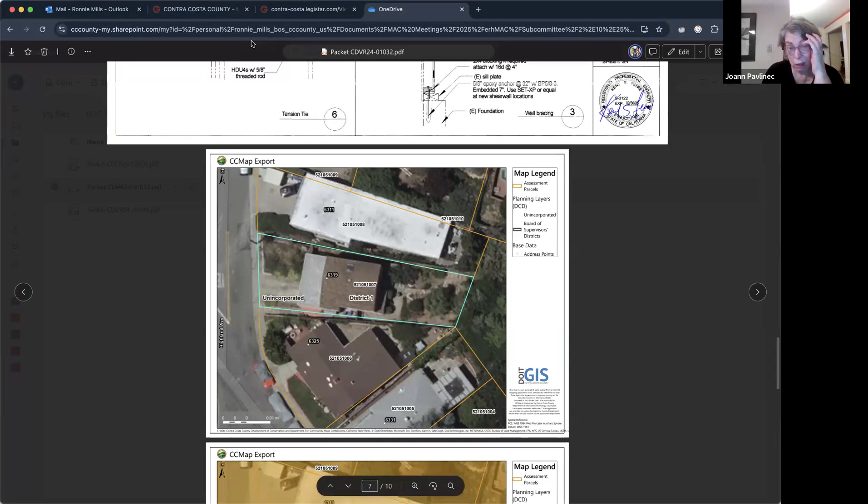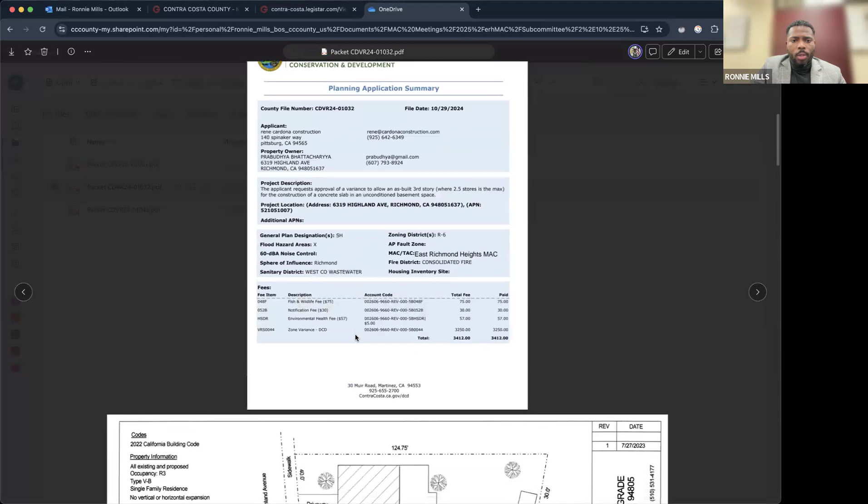All sections, I think. Go up, Ronnie. I put the link in the chat just in case you aren't able to, if you want to look at that on your end also. So, let's start there.

So, Rene, would you want to explain the hatched area, where the garage is, where you're adding the slab and space on this view? Do you see where it says driveway? Yes. And then there's a box that's kind of slotted out, that's like the house. That whole area, half of it on the right side, basically where the driveway's at, that's all slab currently, and the other half is soil.

And there are some concrete stairs that go up to the inside of the house, the second story. Where are the stairs? More or less right in the middle.

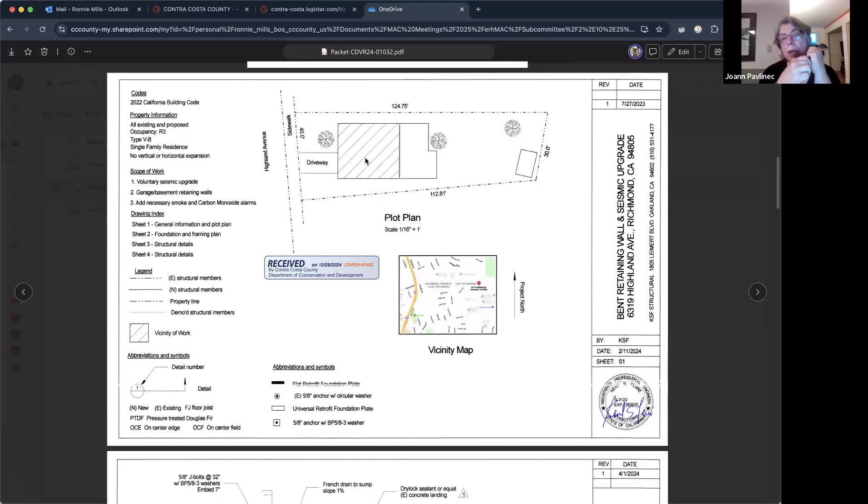Shall we go down to the next drawing? Jinwei, do you have any more questions on this drawing? I don't have a question. Oh, just there, you can see the stairs right there.

Okay, so I see the garage, and then are you adding, okay, so this is the garage. Only half of this is a garage, is that correct? So yeah, there's concrete where it says the garage area, and then on the other side of the posts is basically just soil. And that's where you're adding the concrete? Yeah. What about the area to the right of the garage and the hatched area, what is that?

That area is currently soil as well, about 2 feet above the garage slab. And there's no work in that area. So yeah, there is work. There's going to be concrete on the right side of the steps as well.

Jinwei, do you have any questions on this sheet? Yeah, I do. So everything that has this kind of shaded area is where you're gonna do some work, and everywhere which is white shows there's no work to be done, right? He said, could you point to that area, Ronnie? To the right, all the way to the right, that outline of that section right there. I'm not sure if there's going to be work done here or not. That's right, exactly where you outlined. Yeah, I just try to understand that.

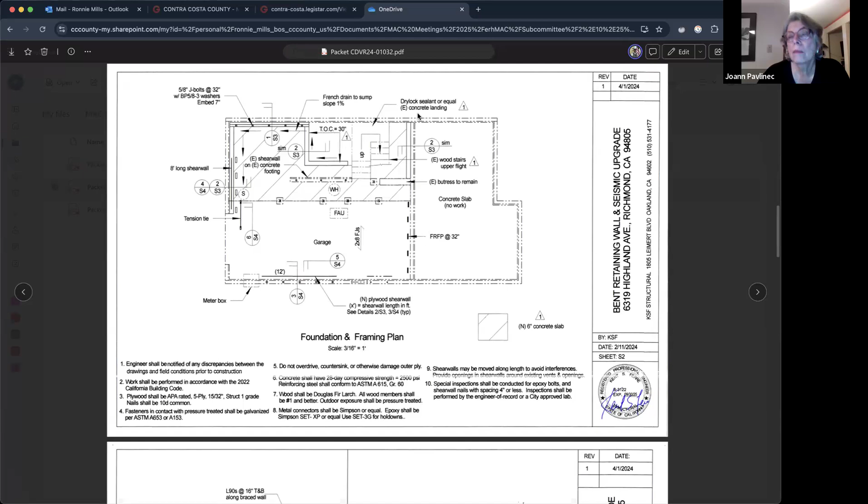Well, should we look at the next sheet now? Yeah, those are just the details. Oh, that says it's going to be 8 feet, it looks like to me. So it's going to be full height there on drawing 1. Yeah, they're gonna dig 4 foot there, right? My understanding is that's 4 foot plus the thickness of a slab and whatever underneath it, so they're gonna at least dig 6 foot before they can make this happen. But you see where it's, Ronnie, can you point to where it says 8 feet, over to the right? The height is right, it's on the left side of drawing number 1. Mhm, yes.

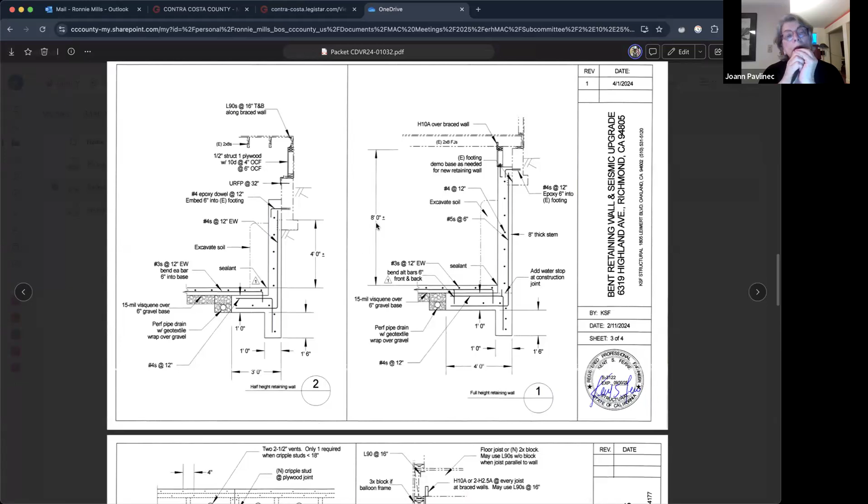Should we go to the next sheet, Jinwei? Yeah, okay, let's move on. And then these are more details. So essentially, you're not adding to the height of the house at all, you're just digging down and adding space to the left half of the garage. Correct, and fixing unconditioned space. Okay. Jinwei, do you have any more questions? No, I don't, but I think they do need some engineering calculation, but that's up to the county.

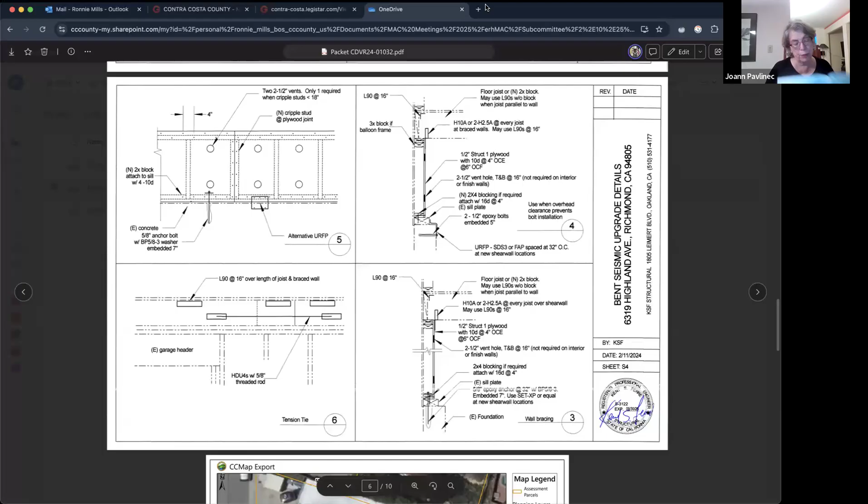All right, so moving on to the next item is packet CDVR 24-01046. Let's see, I believe we've looked at this before. Yeah, this is the applicant's request for a variance and a small lot design review to allow for an 8-foot to 8.5-foot secondary frontage and public road setback, where 15 foot is the minimum and 10 foot is the minimum to the public road, for construction of a second-story addition and house remodel. The existing residence is currently encroaching onto the secondary frontage. This is at 2758 Del Monte.

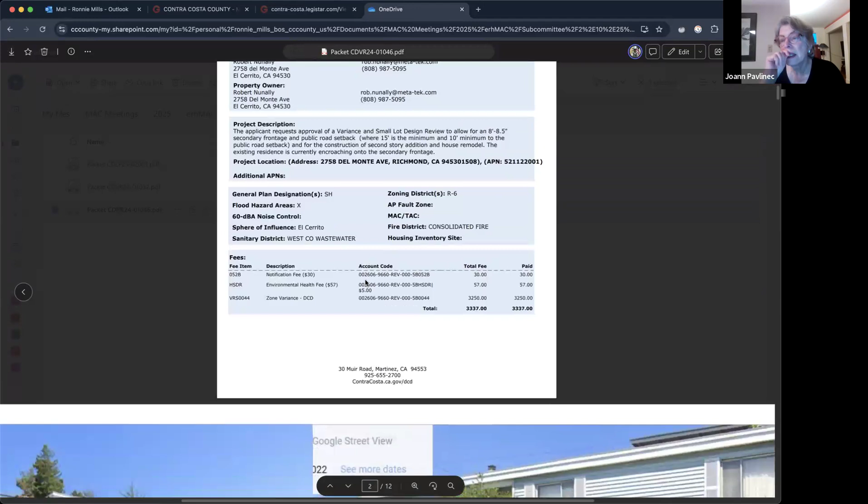Okay, so the applicant is here, two representatives. Do we want to go to the pictures, Ronnie, and maybe the applicants can walk us through what they've changed since last time? Yeah, that's the existing structure there on the first page. Hey Rob, go back to the first page. Hi, this is Greg. I want to point out how close the stairwell is.

In the application, it clearly posts at 8.5, they're calling this the front of the house. I want to make it really clear that we're abandoning this approach to the dwelling, and we're introducing a northern approach. So I just want to make that really clear, because that approach isn't safe, and we cannot make a set of safe stairs to meet today's requirements while staying within the secondary variance. So the stairs will be to the left. Well, actually, look at the left picture, they'll be in the... well, we'll see later on.

The approach will be to the left side, or to the left side of the house on the upper hill, so that we can create a proper egress, a proper entrance to the unit, to the facility. Okay, let's look at the next one, unless you have any questions.

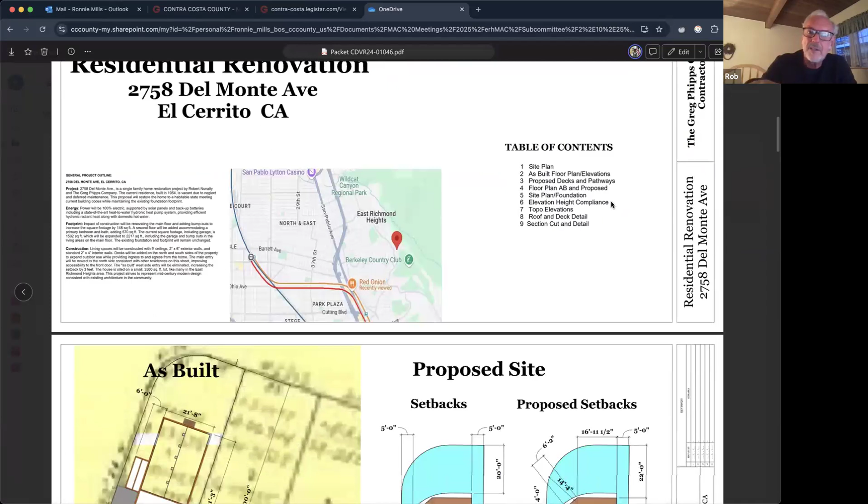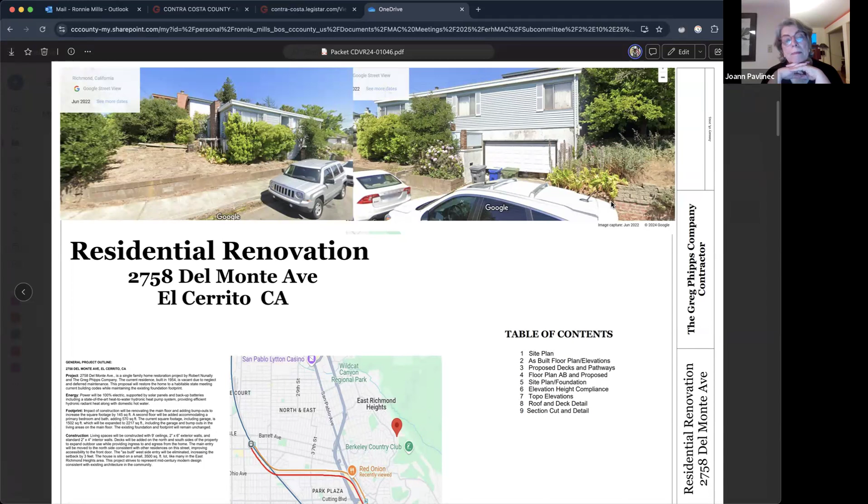No, it's clear to you where the entrance is now. I think I need to look at the plan to see where it is. Okay, look at the plan to see the brick post there above the stairs, or at the stair landing. Yes, rightmost photograph. Okay, so that's going away.

So we're actually adding more space to the front of the house, or to the existing front now. Okay, you can scroll down again.

And this is just showing what the setbacks are, you know, the as-built and the proposal.

And the bump outs, are they notched to the ground, or are they like bays, or do they go all the way to the ground? The bump outs will not go all the way to the ground. No, they'll be bumped out at the floor level.

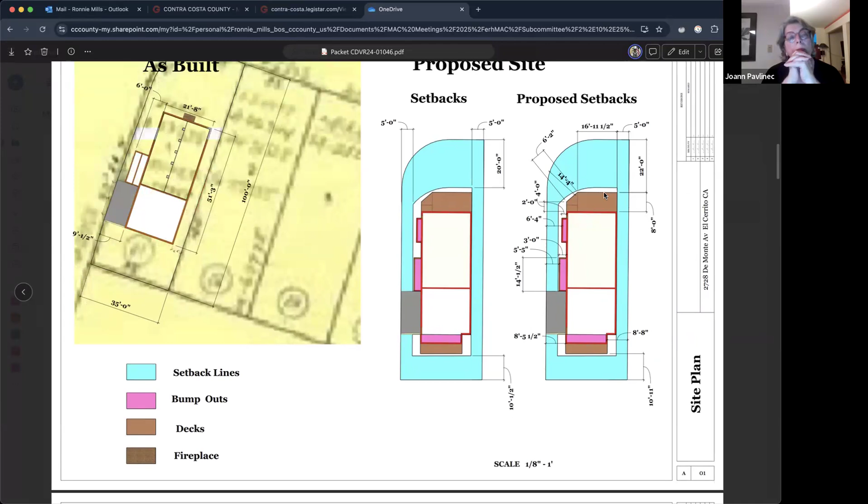Okay. And the stairs are gone on these? Yes, they are. You see where the pink is on this page? That's the proposed bump outs. And that's where the larger one is where the stairs were. Yes.

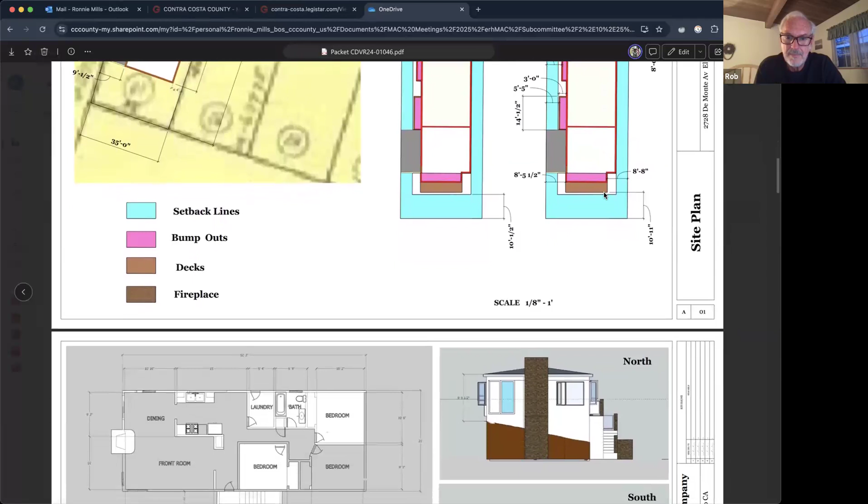Okay. And these are existing. You can see the stairs quite clearly in the south view on the right, and also on the west. Yes. And that just means there's nothing good about those steps.

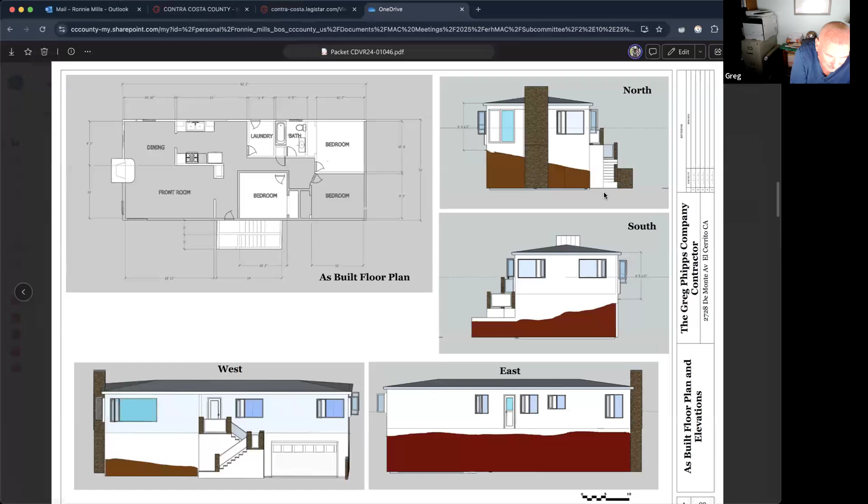Okay, I think we can move on. Yeah, that's a good comparison of the existing compared to the proposed.

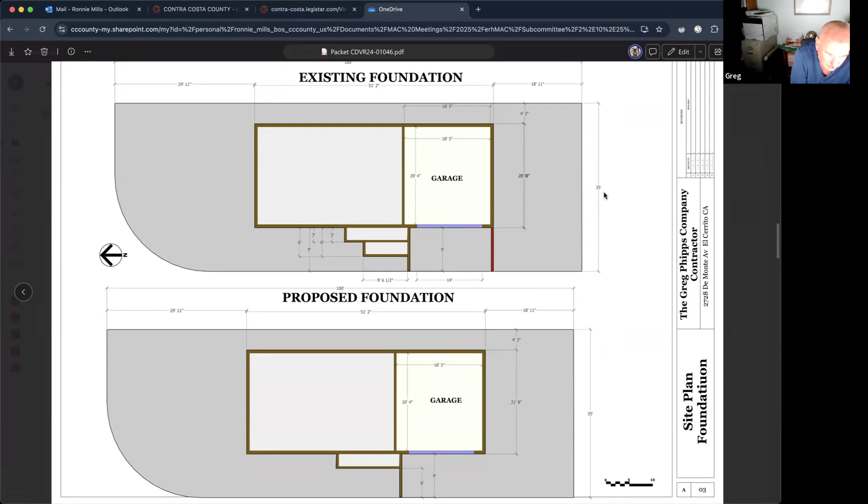We are going to leave the lower foundation, and just make a planter box out of it because it's very low. It only sticks up about maybe 18 inches from the ground. So we'll just line it and make a planter box out of it rather than removing it. Oh, okay.

There you go. So one of the issues you asked about last time was a topo map, and this shows the topo guidelines.

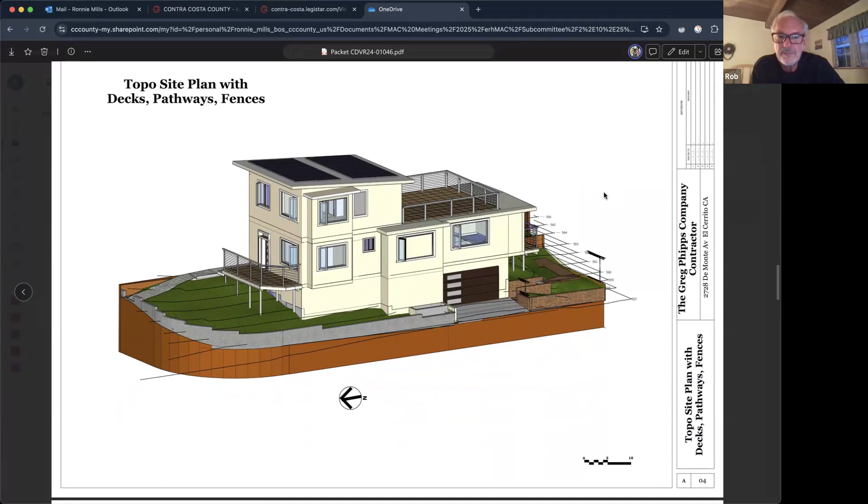And what's the path from the sidewalk to the entry? Yes, it's actually only going to be, I'm guessing, 30 to 40 inches difference, if that, from the walk.

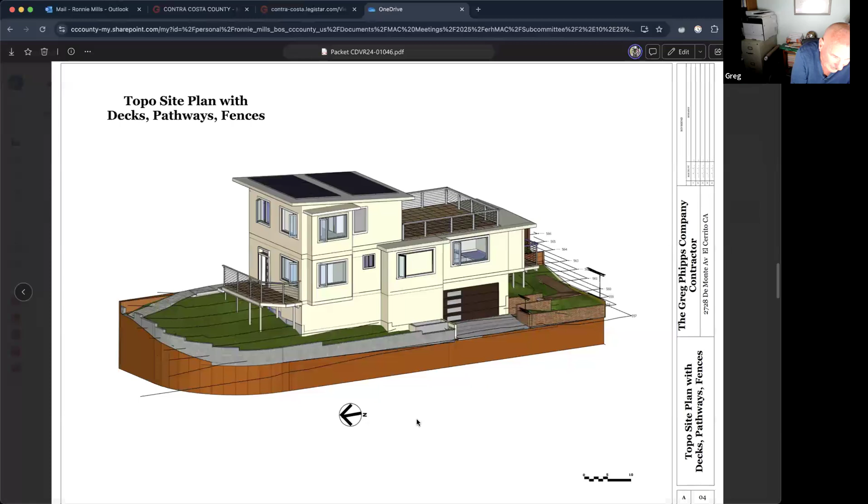From the sidewalk. And is there a walkway, or do you walk on dirt? There's a sidewalk in front of that stone, or in front of the brick or the block wall, but we have to construct that.

Sidewalk, pathway. Yeah, we have to construct the pathway, but it's gonna be fairly easy to do. I'll probably get a small piece of equipment and just form the dirt around there, and actually it'll look quite nice in a way. I think it'll be a very nice entrance. I think it's gonna look really cool.

Plus, you get out of your car and walk right up there, and there's going to be a maximum of 3 steps to get into the first floor of the house. On the north side. Yes, and the block wall there is an existing block wall. We're not building that block wall.

It's been there. So yeah, we will just walk up from the street, which is the level where the brown is on the north side. We'll just walk in from the street on a path up to that deck and front door.

Okay, I think you see the topo follows the line, it follows the, right. So I'm still not clear, is that going to be a stone pathway? Is it going to be a concrete pathway?

Well, we have to have some latitude. I mean, I could do flagstone, I could do... Well, I'm just wondering, is it going to be dirt? I'm just curious because I don't see anything there yet. It's gonna be a solid surface, either concrete or pavers. Okay, got it, that's all I need to know.

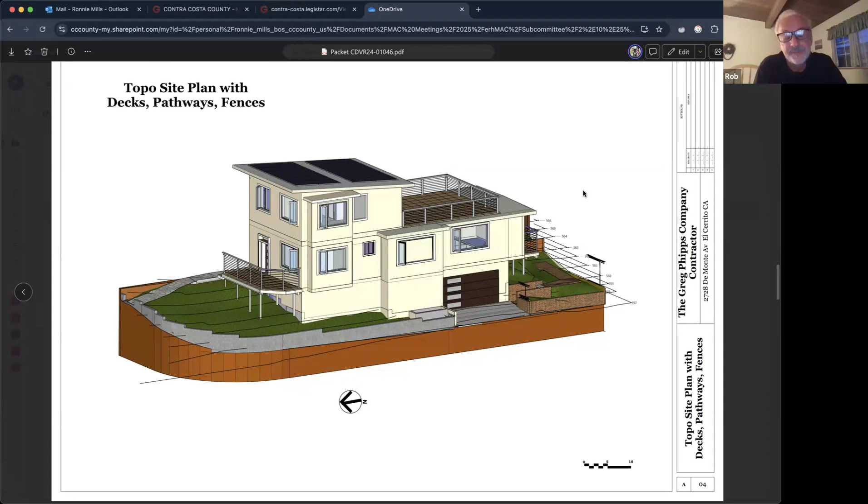And you can see the north entrance, there's an existing concrete slab there. We're gonna extend that out to meet the two steps going up to the future deck. And then the entrance will be flush.

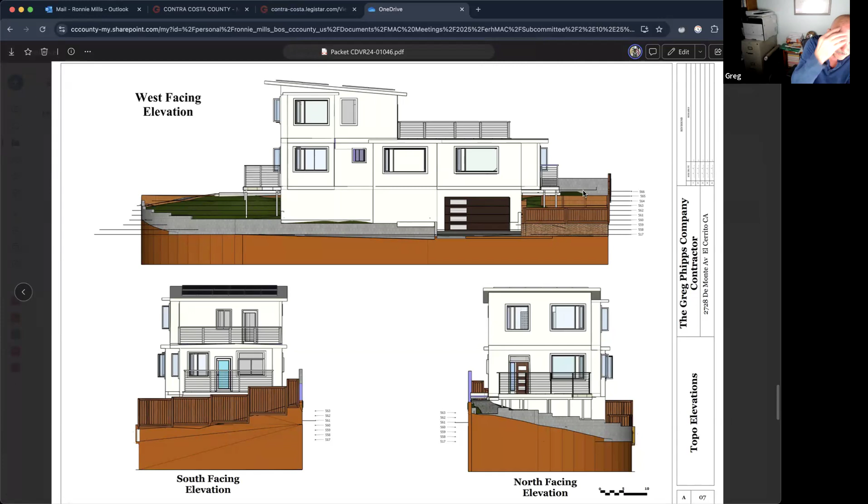Again, you can see the door, that's a variance. If you want to go back up to that slide, please. The variance measurements show from the base of the foundation to meet the less than 35 feet requirement for the secondary unit on a second floor. And then you can see that we're meeting it as a split level, meaning at the peak of the roof, that's at the base of the bond beam in the garage, under the garage floor. That's what Everett suggested we do, so I showed that in this drawing.

So you said a secondary, are there two units here? No, no, okay, you said secondary unit, you confused me, I thought there was one unit. No, we don't want a secondary unit. Yeah, okay, you said secondary, that's why I was just... No, actually, it's really not in our best interest. We just hired an engineer, and we're gonna have to put a grade beam through the axis of the house to support the upper floor, so it's not really applicable for this kind of structure. We need to have all our concrete in place and not be digging stuff out of the existing foundation.

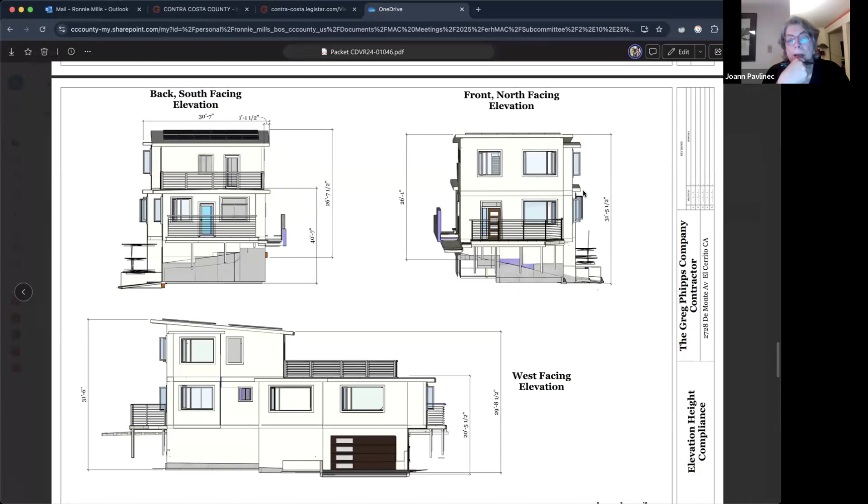Okay. Jinwei, are you ready to move to the next? Yeah, okay, I am pretty clear about it.

Any questions on these? I think we can keep on moving.

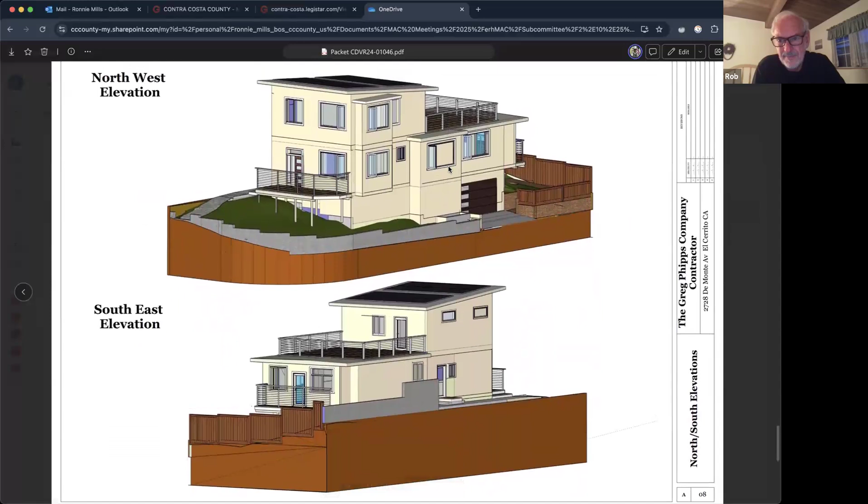And this is stucco, is that what you're doing? It's going to be Hardie panel siding. Oh, you'll go down, you'll see there's a pretty good detail right there of what we're gonna do. Oh great, so it'll be Hardie panel flush with the trim around the windows. Then put that on first and use the moldings that they provide. And then of course you see Tyvek and the usual.

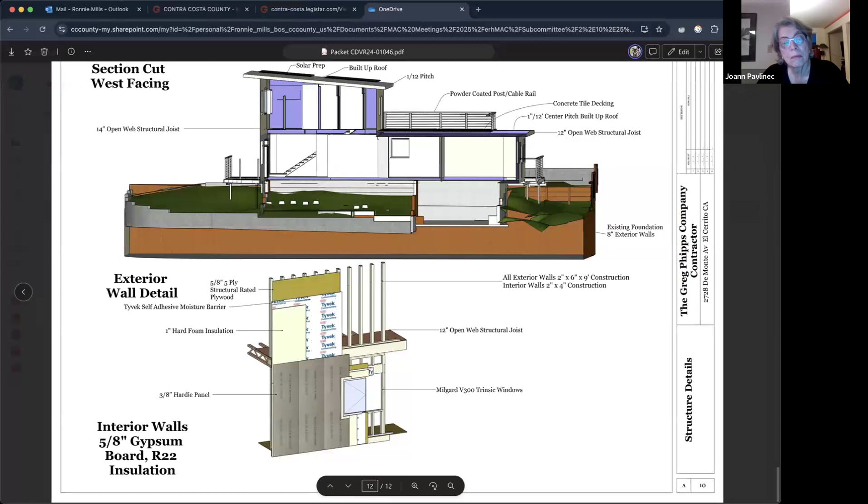So okay, okay, next drawing. I think that's it, isn't it? That's it, okay. Jinwei, do you have any questions or comments or points for discussion? No, I think I'm pretty clear. I think this is coming a long way from the last time. Yeah, I think so too.

I only have one question to discuss with you, Jinwei, and that's the under area of the porch in the front, if that needs screening or not. How tall is that space under the porch, on the entry deck? We didn't show it, but we plan on screening it anyway because we're gonna put vines on it. And we're gardeners, and we're not gonna leave that open. Okay, great. That's something we always look at when there's space like that, because your design review it, and you know that's great.

So I do have one question. On your elevation, just the garage, like a west-facing elevation, so one side seems like there were brick facing the sidewalk, and were those brick existing? And on another side is kind of a concrete block wall. So I was just curious about the decision on these two different materials that you picked.

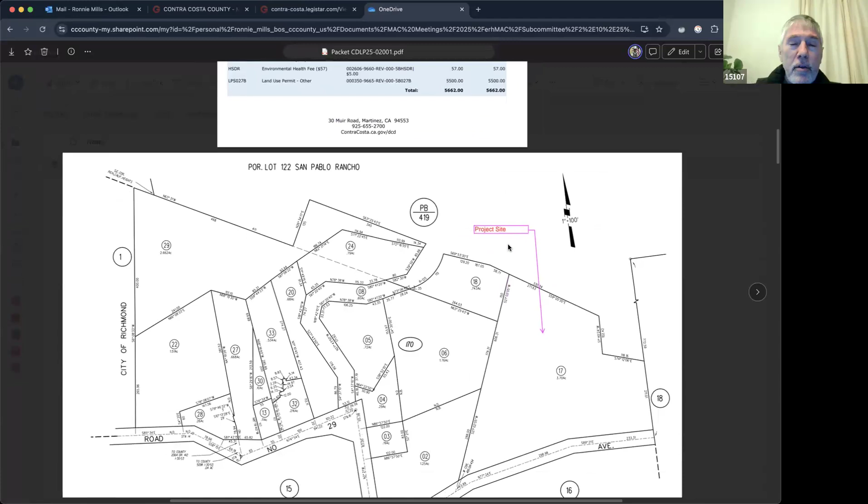Okay, so do you want to tell us a little bit about your project? Thank you, yes, it's a little curious. I've been there 24 years. No substantial construction has happened there for 74 years.

In the 1930s or early 40s, it's not clear, there was a cottage built there. And in 1951 there was a house with a kind of outbuilding, which is another little structure - basically it's 2 cottages plus a full-size house.

And for the thing from the 30s, there appear to be no permits, but the assessors have a record of the house built in 1951, and included in that is a photograph of the outbuilding, the other cottage, which was not called out in the permit stuff we saw, but they have pictures of it, so it was clearly there.

So what happened was it was recommended to me that I replace the electrical service on the cottage. The permit history shows basically no construction except we put in solar and replaced the electrical service on the main house - two separate things that occurred at different points over the last few years.

And when I applied for this permit to replace the electrical service on the cottage, the county came back and said, well, you didn't get planning approval for this, so you can't do anything. So I said okay, and I've been going through the process with them, and I'm actually waiting for an update because they want me to apply for a permit for the 3rd unit, but I don't know which one they're considering the 3rd unit.

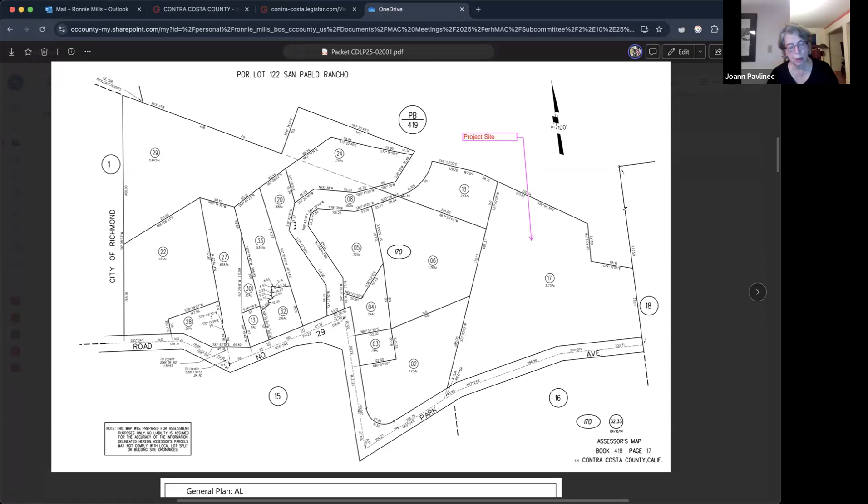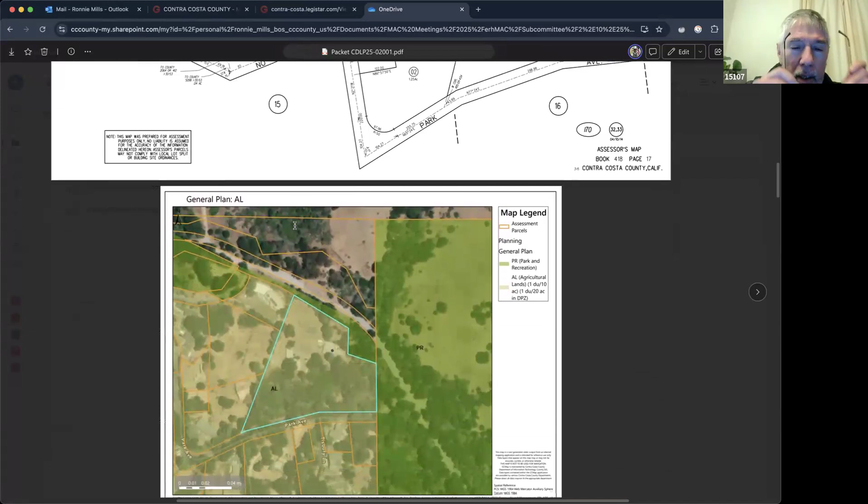Well, what we're seeing is this is a cottage that's 1,285 square feet that needs approval. So can you tell which one it is by the size? Yeah, that would be what I think of as the big house. It's not big by current standards, but it's bigger than the cottages. The cottages are both like 600 to 800 square feet.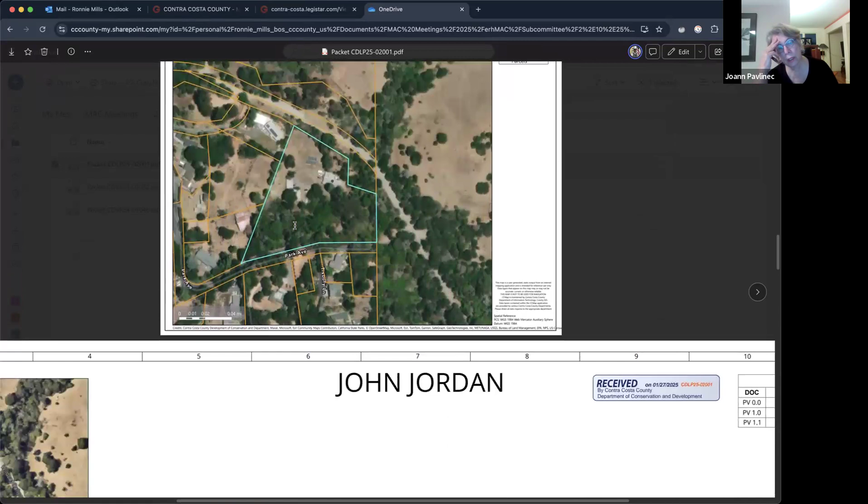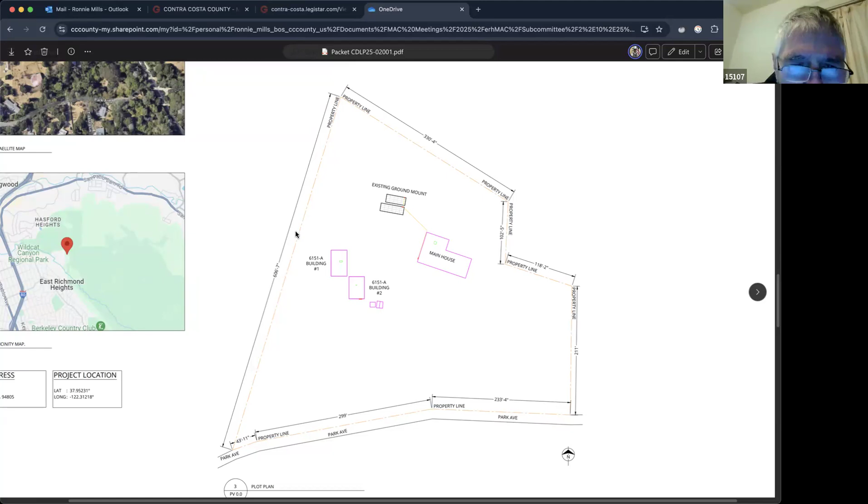Well, okay, we can keep going. Is that it? Okay, so there's the main house - let's look at this one. The thing on the right, the biggest rectangle, is the main house. And then the little rectangles up on the hill are the solar panels. Then farther down to the left, there's building 1 and building 2, or building A and B. I can't actually read this. And those are what I call the cottages.

But the main house is actually 1,285 square feet. So it's bigger with the garage, but I don't think they counted the garage. How big are the two smaller buildings? Oh, they're like 600 to 800 square feet.

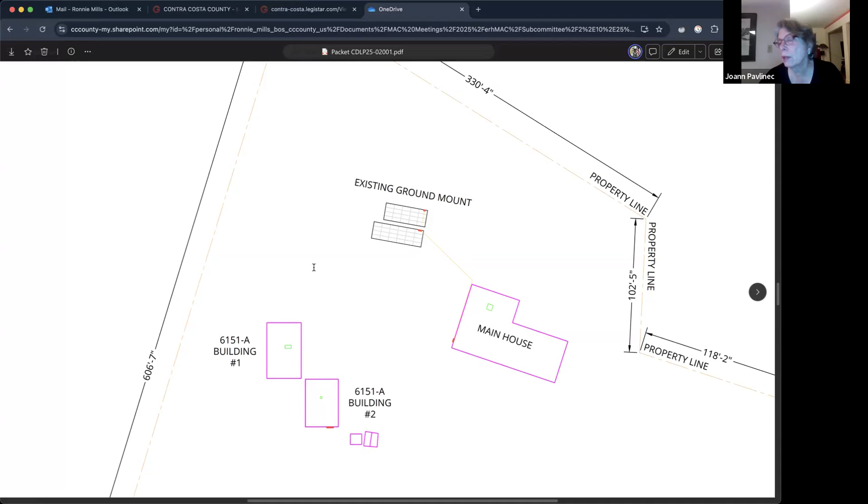Okay, so I think it sounds like there's some confusion as to what you understand we have, because what we're looking at on this application summary is a second residence of 1,285 square feet. Well, I'm not proposing to build anything at all. I have not built anything at all since I've been there. I don't think anything's been built at all in the last 70 years.

Sometimes it's legalization - that's what it is. It's already built, they say it's legalization of an existing structure. Okay, and we're supposed to do design review, a small lot design review.

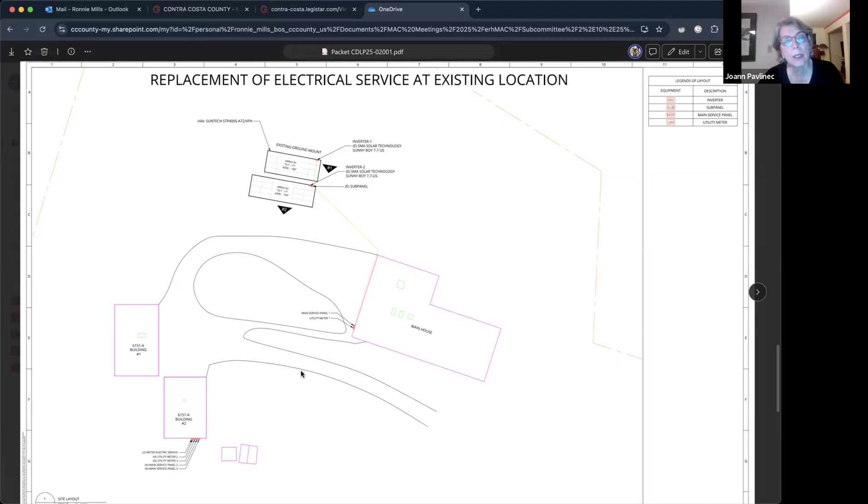So do we have any drawings? Well, I'm working on the drawings, but I'm waiting for feedback from them. They sent me - I did floor plans and elevations, and I guess I didn't do... they're asking for elevations, but I'm asking them to designate which building they want me to apply for the permit for, and they're going to get back to me on that. That's where we are on the process.

Okay, well, if we're going to do design review, which is what we're charged to do based on the application, we need elevations. So in my view, there seems to be some confusion. I think we need to continue this until we resolve the issues. Yeah, I kind of agree with you. I'm not quite exactly sure what we are reviewing, so maybe we could wait until the county figures that out, then we can have elevations.

But if it's existing already, grandfathered in, why are we doing this? Well, we're not sure it's grandfathered in. It doesn't say anything about that in the application. They have not told me that it's grandfathered in. This has never come up until just now, but where we're at now is I'm waiting for them to give me a little more information.

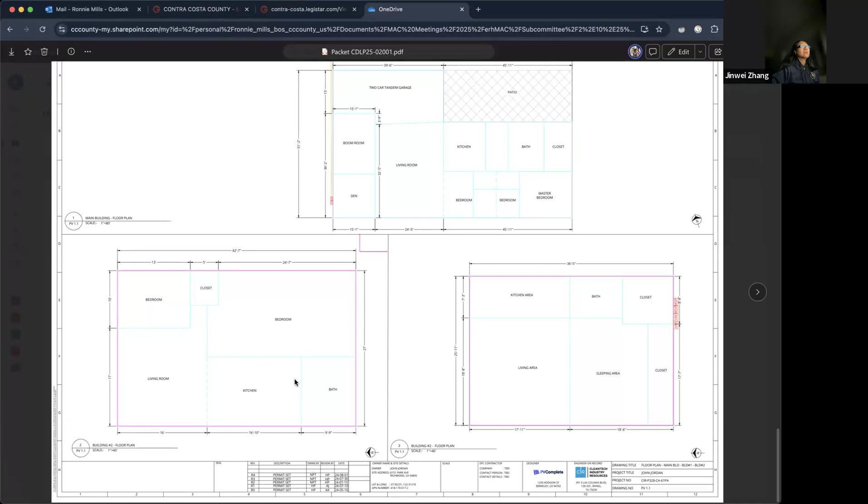Which building is being talked about for which thing - I was planning to get that information from them and then do elevations of one structure or all three, whatever's needed.

I think we just need to continue this to another meeting, and hopefully you can get some information and figure out what they want and come back. Okay, that sounds fine, I will work on that.

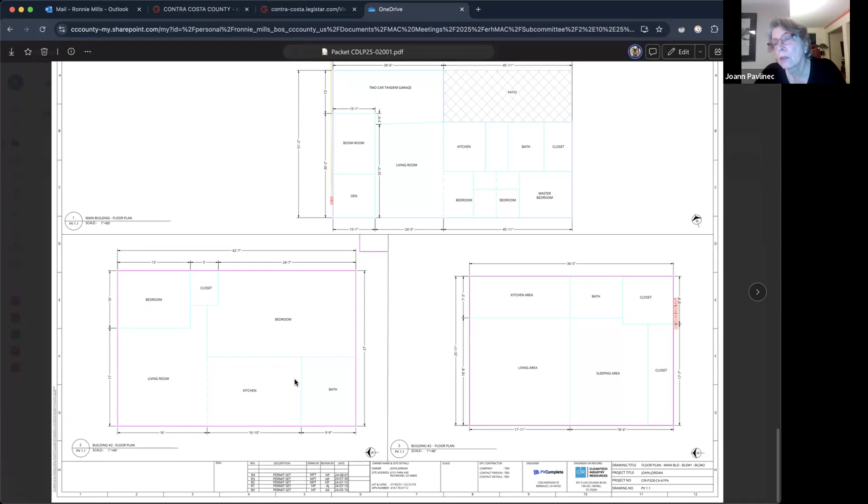Motion to continue. Second. Okay, so that's what we'll send to the planner, and we'll let the planner know that there was some uncertainty as to the appropriate building, and we didn't have any elevations.

But do you see anything missing other than elevations that you might want, as long as I'm doing this anyway? Normally they probably will want a site plan to see what's going on the site, where the roads are, the buildings are, the pathways, the trees, stuff like that. Normally the county will ask for that.

But I'm not the one in the place to require anything, I'll clarify that with them. I just want to let you know that it might be something they will ask besides the elevation.

Okay, cool. And the setbacks, they're all at least 100 feet from the lot line, so you're probably not going to have any problem with it. I'll do whatever they want, but I think we're good on that.